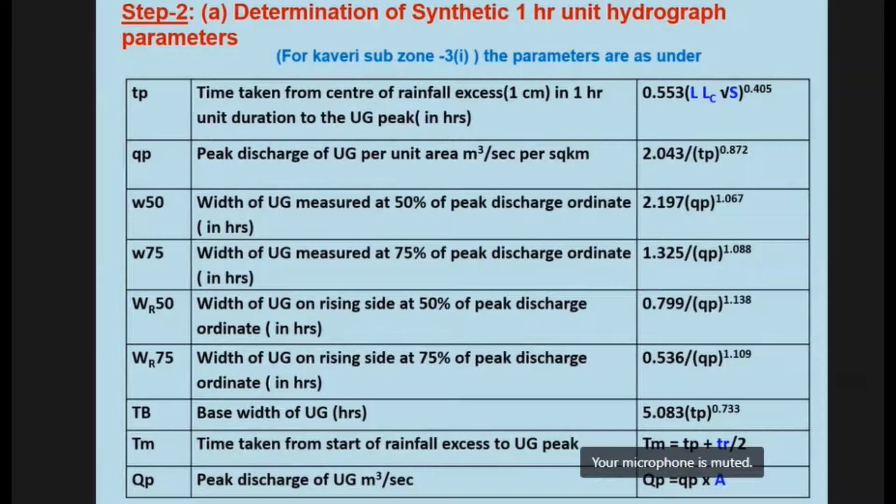सिंथेटिक यूनिट हाइड्रोग्राफ सही बना या नहीं, यह चेक करने के लिए एक फॉर्म मेथड है, एक एम्पिरिकल मेथड है, जिसमें ए एरिया पे चूंकि 1 सेंटीमीटर रेनफॉल हुआ तो टोटल जो डिस्चार्ज आएगा वो इस वैल्यू पे आ जाएगा। सिमिलरली डायरेक्ट रन ऑफ सिंथेटिक यूनिट हाइड्रोग्राफ से निकलेगा, उसके ऑर्डिनेट्स को बेस से मल्टीप्लाई करने के बाद, जो बेस 1 आवर है उसको 60 into 60 सेकेंड्स में कर दिया गया। सारे ऑर्डिनेट्स क्यूबिक मीटर पर सेकेंड में हैं, तो टाइम से मल्टीप्लाई करने के बाद वो टोटल डिस्चार्ज दे देगा, और दोनों फिगर्स को मैच कर लेना होगा। अगर दोनों बराबर आ रहे हैं, तो यह दिखाएगा कि सिंथेटिक यूनिट हाइड्रोग्राफ का शेप करेक्ट है।

अगर वो शेप सही नहीं आता है या दोनों वैल्यू सही नहीं आती हैं, तो फॉलिंग लिम्ब की तरफ जो WR75 के बाद लोकेशन पड़ता है, उस अंत वाले लोकेशन को आगे पीछे करके आपको सिंथेटिक यूनिट हाइड्रोग्राफ के एरिया को A divided by 0.36, यानी 2.78 A, के बराबर लाना है। दोनों बराबर होने के बाद आपका सिंथेटिक यूनिट हाइड्रोग्राफ करेक्ट माना जाएगा।

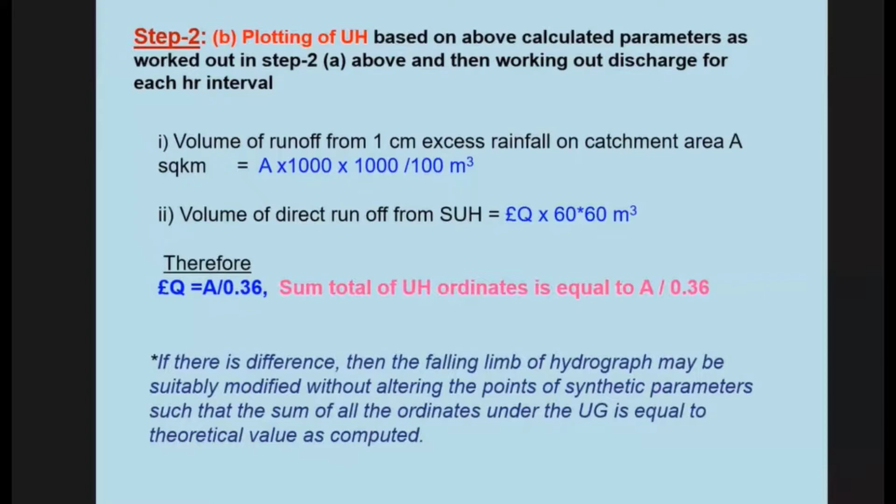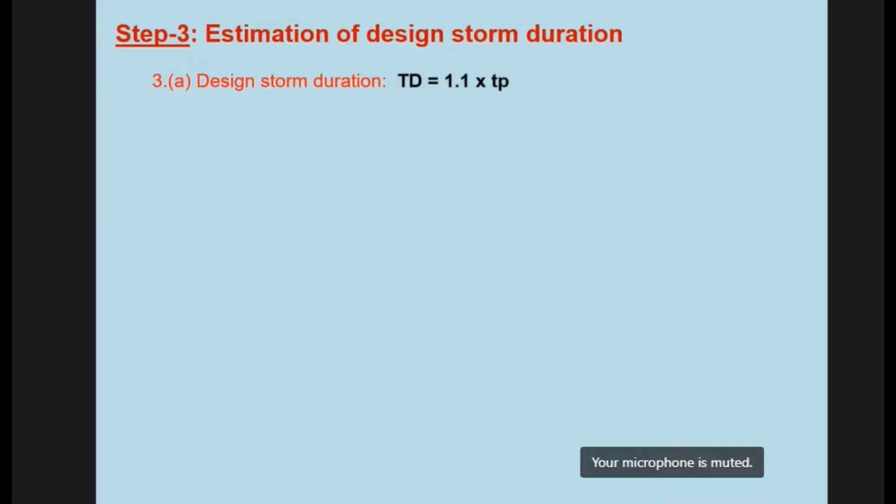अब हम लोग आगे चलते हैं, जैसे हमको डिजाइन स्टॉर्म निकालना होगा, डिजाइन स्टॉर्म के लिए हमको Q50 निकालना है। डिजाइन स्टॉर्म के लिए TP हम लोग पहले निकाल चुके हैं, एज पर आवर, जो हमारा एम्पिरिकल फॉर्मूला है उससे TP निकल जाता है, जिसको 1.1 से मल्टीप्लाई करने के बाद डिजाइन स्टॉर्म आता है। 1.1 से क्यों मल्टीप्लाई करते हैं, तो यह हर एक CWC रिपोर्ट में यह फैक्टर दिया हुआ है। जिस सब जोन में जाएंगे, उस सब जोन के रिपोर्ट में TP को किस फैक्टर से मल्टीप्लाई करना होगा वो देखना होगा, और मोस्टली यह वैल्यू 1.1 रहती है।

अब जब हमको डिजाइन स्टॉर्म मिल गया तो जैसे पिछली बार हम लोगों ने किया था, इस डिजाइन स्टॉर्म पीरियड के लिए हमको R50 देखना है, मतलब 50 ईयर रेनफॉल फॉर दिस डिजाइन स्टॉर्म पीरियड। वो कैसे निकालेंगे? उसके लिए सबसे पहले 50 ईयर 24 आवर्स रेनफॉल, जो डिफरेंट मैप्स हमारे पास हैं, उससे हम 50 ईयर 24 आवर्स रेनफॉल डेटा निकाल लेंगे।

कोई पार्टिसिपेंट बताइए, कैसे मिलेगा हमको 50 ईयर 24 आवर रेनफॉल डेटा? From where we will get? ग्राफ रेशियो से निकालेंगे? नहीं, ग्राफ से नहीं निकालेंगे हम लोग, उसको निकालेंगे। अच्छा, यह आपको छोटा वाला दिख रहा है, चलिए।

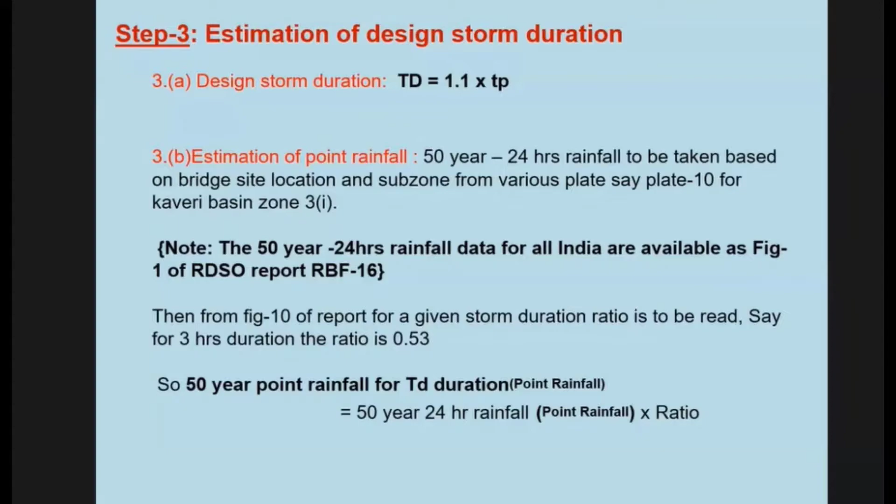50 ईयर रेनफॉल डेटा निकालने के लिए आपको CWC रिपोर्ट्स में जो मैप्स निकले थे वो देखना होगा। जैसे मैंने आपको ऑल इंडिया मैप दिखाया था, उसी तरह हर एक रिपोर्ट के लिए अलग अलग मैप दिया हुआ होगा, जिसमें 24 आवर्स रेनफॉल भी होगा, किसी में 1 आवर रेनफॉल होगा, और 1 आवर से 24 आवर्स में कैसे चेंज करेंगे यह डेटा दिया हुआ होगा, एक रेशियो दिया होगा।

जब वो 50 ईयर रेनफॉल डेटा आप निकाल लेंगे, तो फिर एक रेशियो, एक ग्राफ मिलेगा। जो ग्राफ मैंने दिखाया था, उसमें एक्स ऑर्डिनेट पे आपका जो स्टॉर्म ड्यूरेशन लिखा हुआ है, जो आपका डिजाइन स्टॉर्म ड्यूरेशन है, वो एक्स एक्सिस पे है। और वाई एक्सिस पे क्या है?

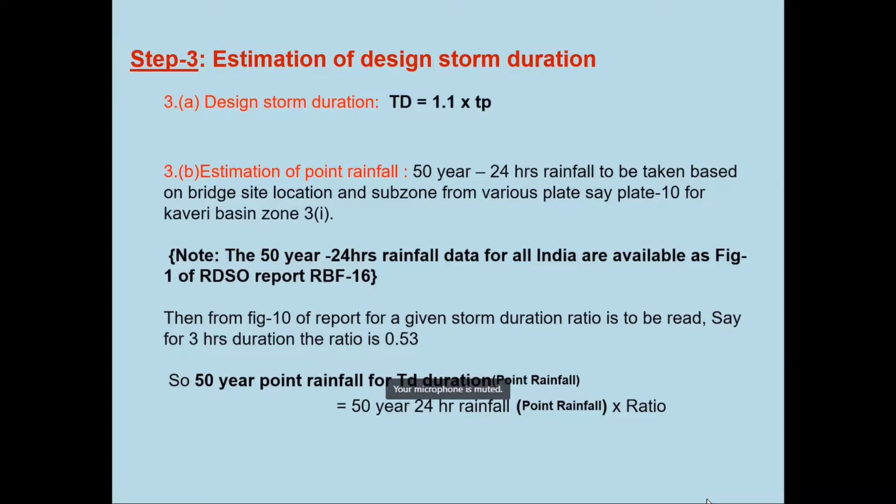इस चार्ट का नाम हुआ, उसमें देखिए ऊपर में लिखा है एरियल रिडक्शन फैक्टर फॉर कन्वर्टिंग पॉइंट रेनफॉल टू एरियल रेनफॉल। जो हमारा RBF 16 रिपोर्ट था, उसमें एक सिंपल सा टेबल दिया हुआ था।

उस टेबल में भी स्टॉर्म ड्यूरेशन था और एरिया था, बट दैट टेबल वाज शॉर्ट, क्योंकि वहां पे एरिया हमें सिर्फ 25 स्क्वायर किलोमीटर तक था। और हम लोगों ने ये भी माना था कि स्टॉर्म ड्यूरेशन भी 3 घंटे से ज्यादा नहीं होगा। दैट इज व्हाई दैट टेबल वाज शॉर्ट।

लेकिन जब हम बड़े एरिया और बड़े कैचमेंट को करते हैं, तो उसमें स्टॉर्म ड्यूरेशन 24 आवर्स तक का रखा गया है। अगर 24 आवर्स से ज्यादा का भी स्टॉर्म ड्यूरेशन हमको डिजाइन स्टॉर्म मिलता है तो हम उसको 24 आवर्स के लगभग ही मानेंगे।

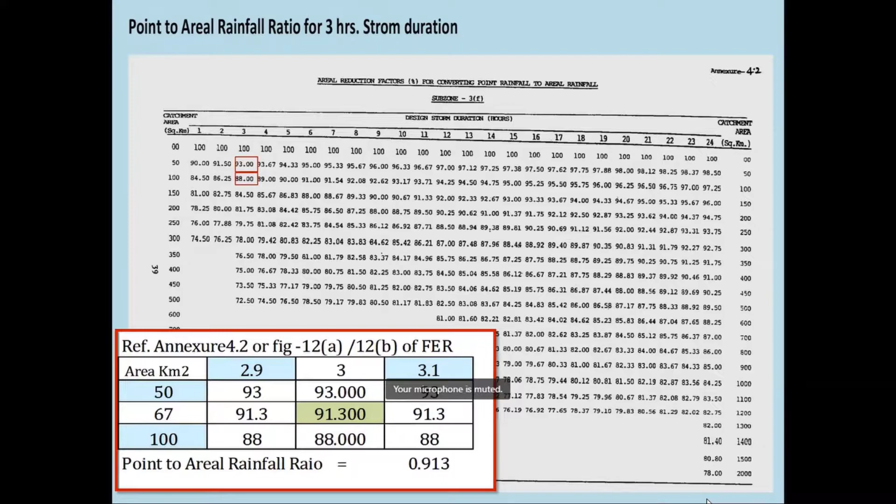एक अमरावती नरखेड लाइन का था, ये नागपुर डिवीजन में न्यू लाइन कंस्ट्रक्शन के लिए था। ओके,

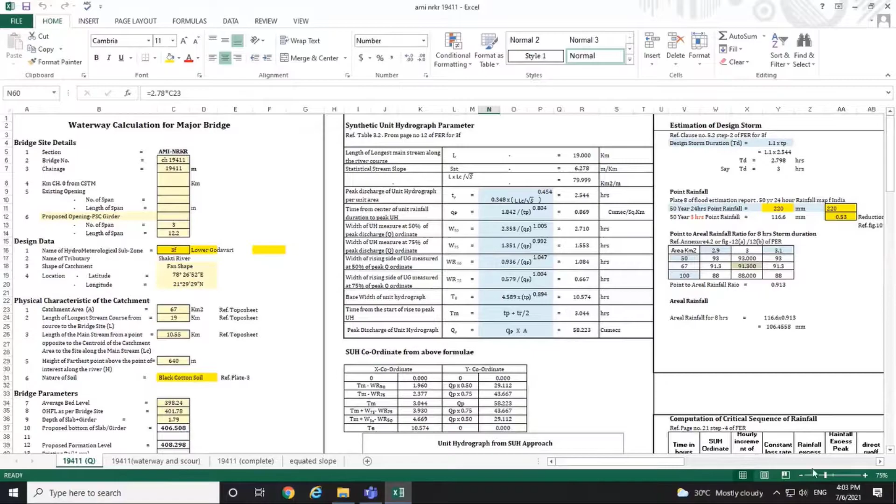So these are the cells where you have to input, you have to fill the input. So this was the latitude and longitude के हिसाब से this is falling in the 3f area. तो आपको जहाँ ब्रिज बनाना है that location you have to collect the latitude longitude उस location का क्या है।

जैसे in this example the latitude was 78 degree 26 minute 52 second and then longitude was 21 degree. So that was falling in the 3f area. Okay, so then you have to refer the report of the लोअर गोदावरी 3f जोन के लिए आपको रिपोर्ट को रेफर करना है।

और उस रिपोर्ट के हिसाब से then these are the constant and these are the formula for working out the coordinate for the unit hydrograph। जो बताया था empirical formula जो unit hydrograph के जो है that depend on the what report you are referring, किस पर्टिकुलर जोन की हाइड्रोमेटीरियोलॉजिकल जोन की आप रेफर कर रहे हो उस पर डिपेंड करेगा। सो फॉर द 3f जोन these are the constant।

कावेरी में आपने देखा था some constant are different but it will depend on the L, LC and square root S only। but इसके जो prefix हैं और जो power है that is the different is for the different all.

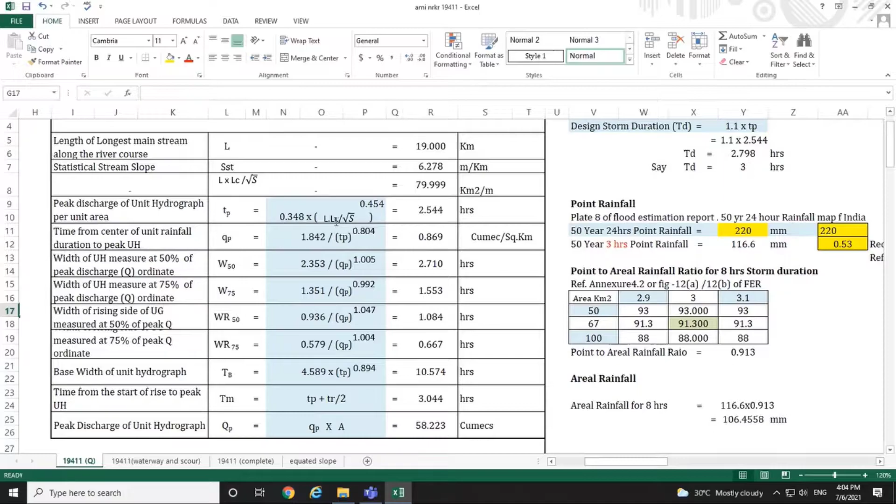The different zones have different values, so depending on your hydrometeorological zone, you can modify this formula for the first instance, then you can use that Excel sheet.

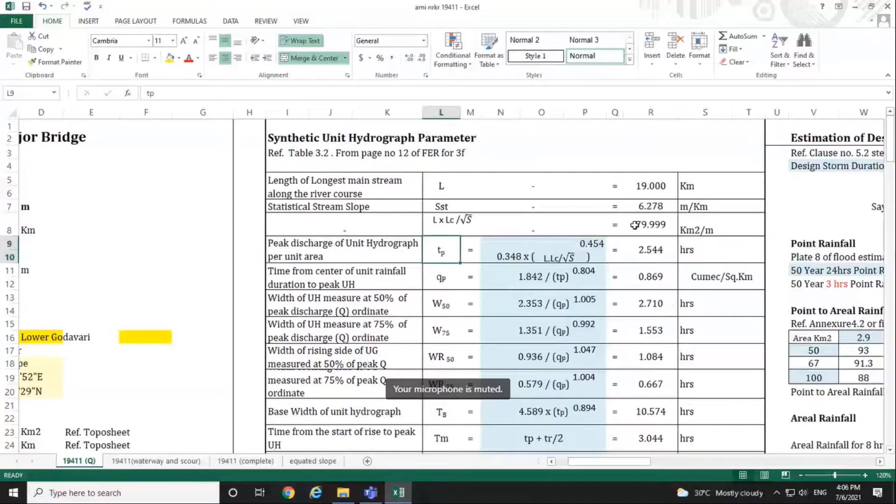This has been calculated, then automatically your value comes here. So these are the values for fixing the 7 coordinates - 1,2,3,4,5,6 - for the coordinates to be made, these are the values of W50, W75.

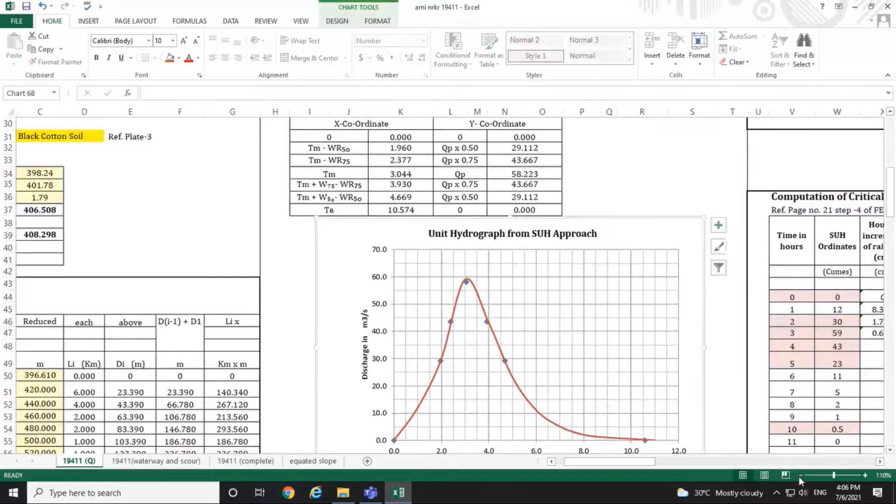Then you can work out how the coordinate starts at 0,0. It will start from 0,0. So the first coordinate is 0,0.

The second coordinate is W50. This is at the highest peak that is coming, in terms of time. This is TM minus what? TM is the time from the start to the peak, this is the time of the highest peak.

TM is the time from the start of the rise to the peak. So this coordinate will be TM minus WR50, you need to calculate. So you will get the x coordinate for this point, and what is the y coordinate?

Peak's 50% discharge - so what was your peak discharge? 58.223. So automatically it will take 50% for you. It will pick up the values from these tables, whatever you've calculated, using the inbuilt formula, and this will give the x coordinate and y coordinate for this point.

Again this is the 75% - this y coordinate is the 75% of the peak, and this is TM minus WR75. So this formula is TM minus WR75, and what value is it taking?

This is the cell R23, this is the value of R23. If you look at this, the formula is R23 minus WR75. So this is giving the value of this cell.

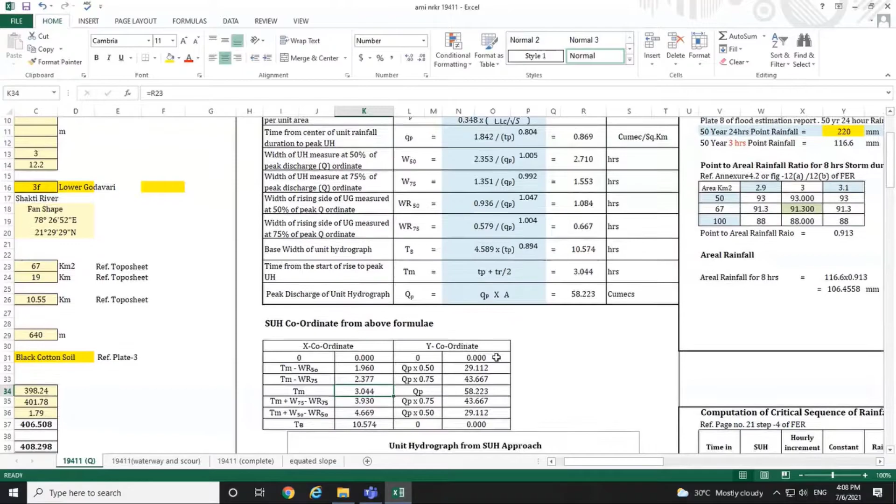Once this is fixed, it will automatically draw the graph - it will mark these 7 points on it. It will not draw the graph directly, it will mark all these 7 points automatically. Then you have to draw the hydrograph.

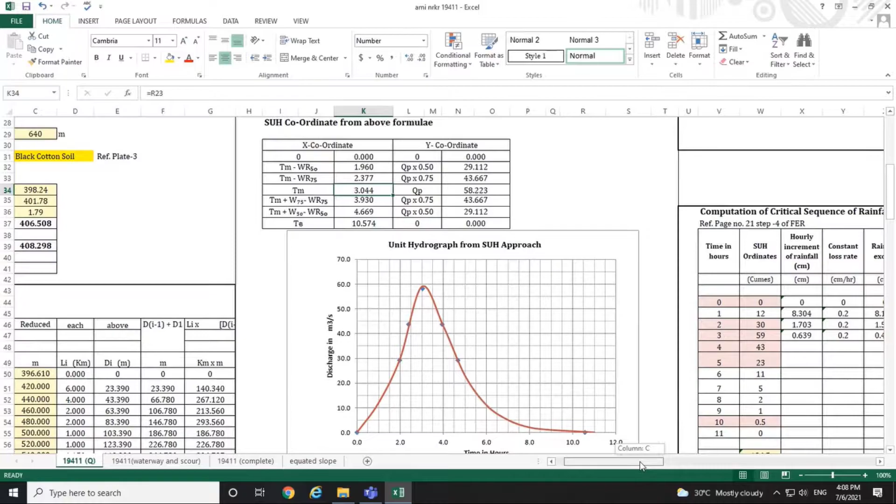Now you need to draw the hydrograph once you have the 7 ordinates. The starting point is 0, and what was the last point in this? The last point is coming to TB is 10.5. So this is the last point.

Okay, so according to that you distributed this hourly, from 0 to 10 and roughly 11. 10.5 we won't take, so we distributed it into 11. Then these are the ordinates.

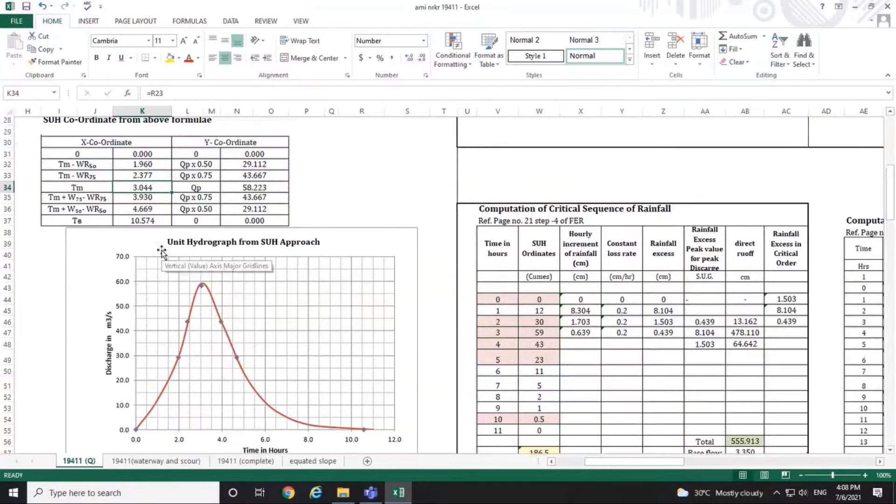At 0, you know the ordinate will be 0. Then this is the ordinate at 1.96 - the x coordinate is 1.96, so generally it is near 2. And at 1.96, the value is coming as 29, so roughly we have taken 30. So these two are your fixed coordinates.

Here we can't play with the ordinates. Then again at 3.044, this is the ordinate - at 3 point your value is coming as 58, so we have taken 59. Then next is 3.9.

All these blue ones that you marked, these are the fixed ordinates. These are the fixed points based on the CWC report. The 7 ordinates we derive for the hydrograph will be fixed ordinates, from which you have to draw a best fit curve.

Okay, so the next is 3.930, so we have taken 4. And after 4, here the value is 43.66, so roughly we have taken it from 43.66 to 43.

Because this is slightly higher than 4 and it's decreasing, so we can take lower values. Then 4.669, so roughly it comes at 5, between 4 and 5. And the value here is 29, so we can take it lower than that - you can roughly derive it or adjust it depending on the curve.

Then the last value is from 10 to 0.5. So these highlighted ones are the fixed coordinates, and you can play with the white cells.

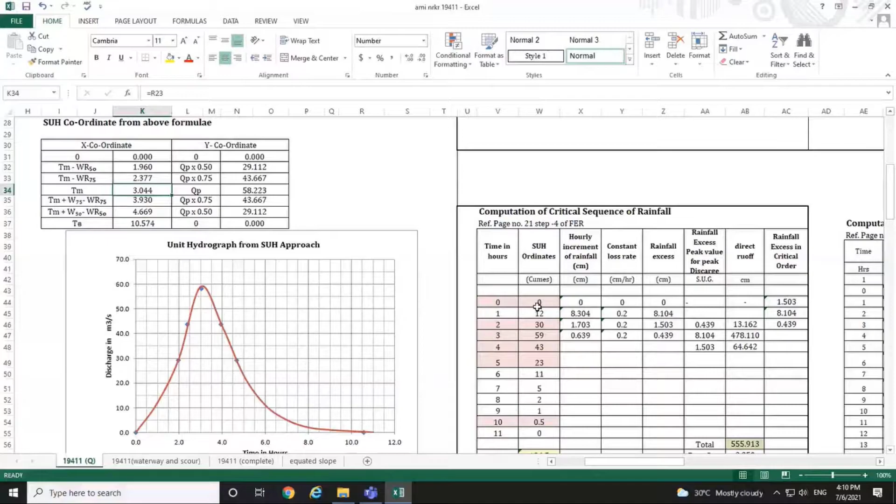So if we change the value, you know that the sum of the ordinates should be equal to the theoretical value. You calculated the theoretical value - how does that come? Theoretical value will be 1 centimeter rainfall over the complete area, and that estimated value is coming as 186 point something.

This is 1 centimeter rainfall over the complete area, reflecting as 186.26, and the summation of your ordinates should be equal to 186.5. Suppose I haven't fixed the ordinate here yet.

I am just deleting every ordinate where I can adjust it. Okay, so this is 150. Now we have to fix the ordinate, and it should form a smooth curve.

Suppose I have taken 9 here, then after 23 you feel that it's declining, so I took 21, then after this 21 it's quite steep, so maybe you can say I took 15.

Then you can take it - then 6 I took, then you took 3, 2, or took it as 1, and then at 11 it is 0.

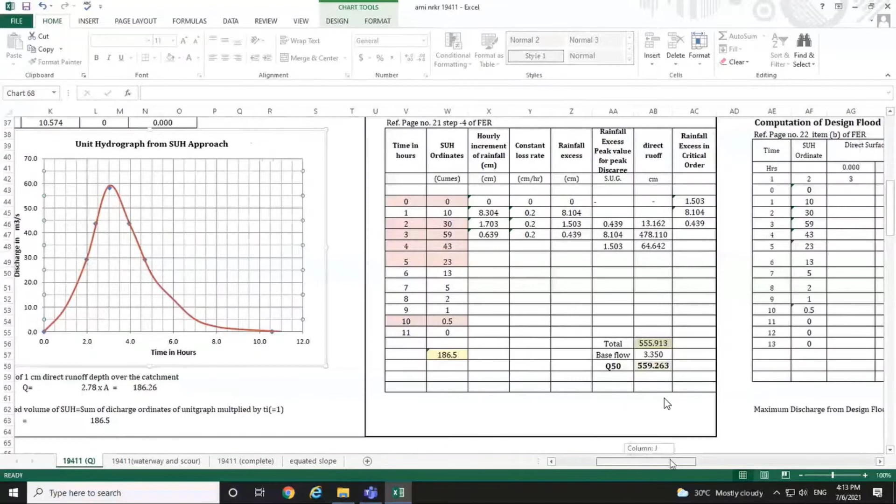Okay, so you have to do permutation combination to draw the best fit unit hydrograph curve. Once it has been plotted, the next target is to calculate the rainfall. TD, as sir explained, is 1.1 times of TP. So TP you have calculated here.

R9 was where? This is R9, 2.544. So it is coming roughly 3 hours. It is coming to 2.798, so you can take it as 3 hours.

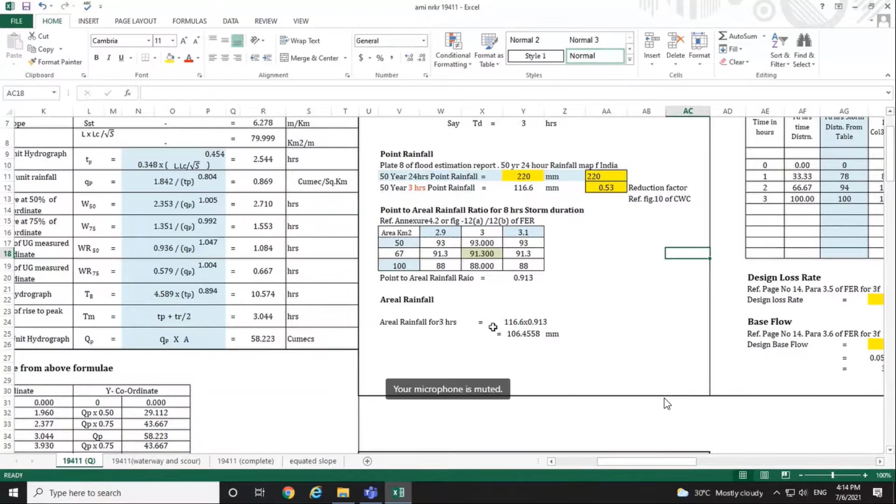And then it is to be distributed into the duration. You have to distribute it into 3 hours. So sir told you how to do the distribution.

So these values to be taken, whatever is in this light sky blue color, are the appropriate values to be taken by referring to the CWC report. For the 3 hours distribution, you have to take this cumulative percentage table that shows how much will be in the first hour, second hour, third hour. That is giving the cumulative rainfall in the first hour, first 2 hours, first 3 hours.

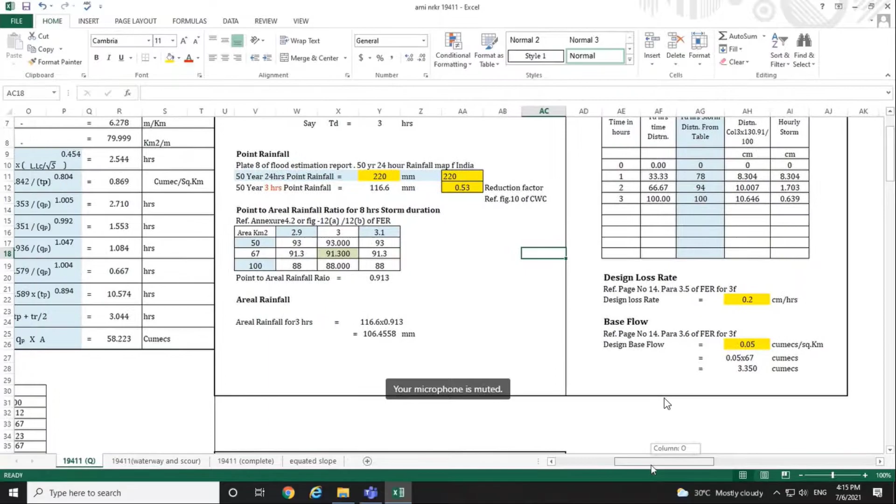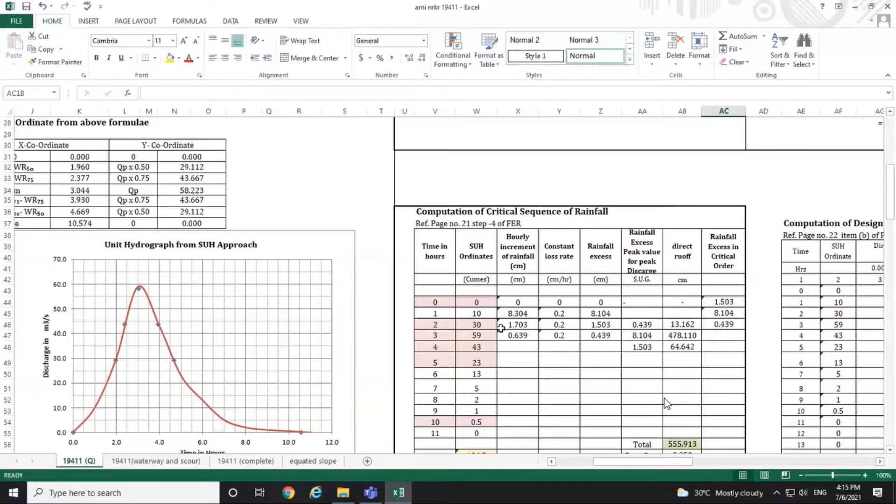Now because of this storm, what will be the hydrograph? You have to take the help of the unit hydrograph. We will superimpose the intensity of the rainfall on the unit hydrograph. This is the intensity of rainfall distributed over 3 hours, from which we subtracted the constant losses.

So this is the effective rainfall. If effective rainfall is less than 0, if it is coming negative, then that is to be neglected since it is surplus to the base loss. So this is 0.439, 1.503, 8.104.

Now we are interested in the maximum value. When will the maximum value come? The maximum intensity will correspond to the peak of the hydrograph. What is the peak of my hydrograph? It is 59, so we have to place this 8.104. It is the summation of the three ordinates.

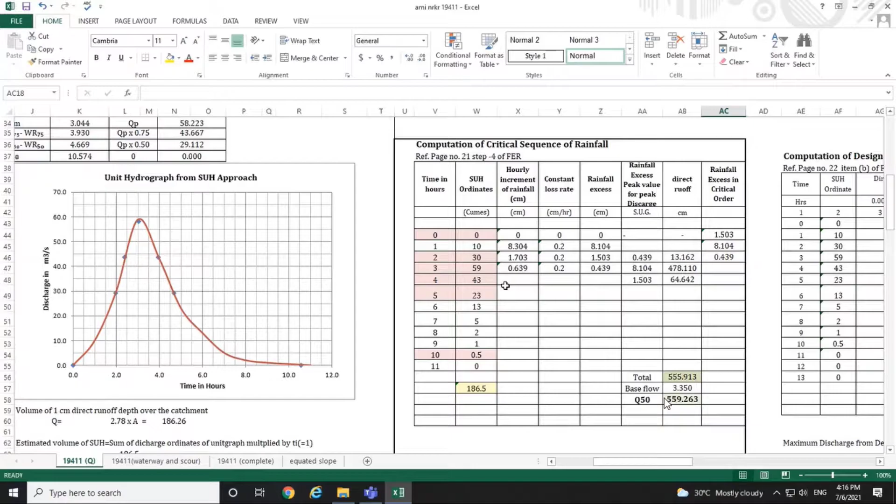If you look at this, this is the final hydrograph. It is the summation of the three ordinates.

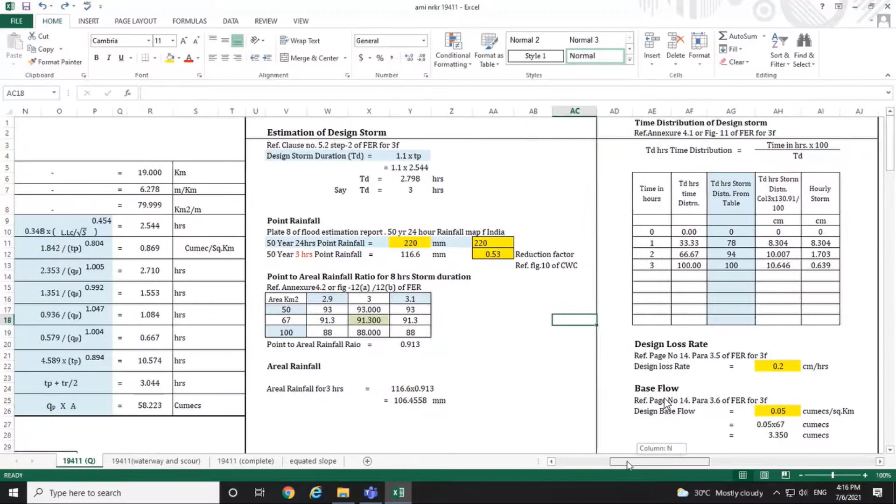This is the unit hydrograph, and we are superimposing on the unit hydrograph. This unit hydrograph has been converted into the flood hydrograph. In the flood hydrograph, this is for the first hour, this is for the second hour, this is for the third hour, and we are looking for the maximum value.

For the maximum value, this is the maximum ordinate of the unit hydrograph.

Okay, so our intensity, what was the maximum intensity? 8.104. So if we multiply this ordinate by 1.503, the value 88 is coming. Multiplied by 8 point, it comes to 243, and multiplied by 0.439, it comes to 4.38.

This means that if we place the intensity of 8.104 in such a way that it contributes to the maximum, it will come again in the middle. That's why we put it against this one.

Then the next higher intensity was 1.503, so that should come against the next higher ordinate of the unit hydrograph. So that will be placed against the 43, which will give the order.

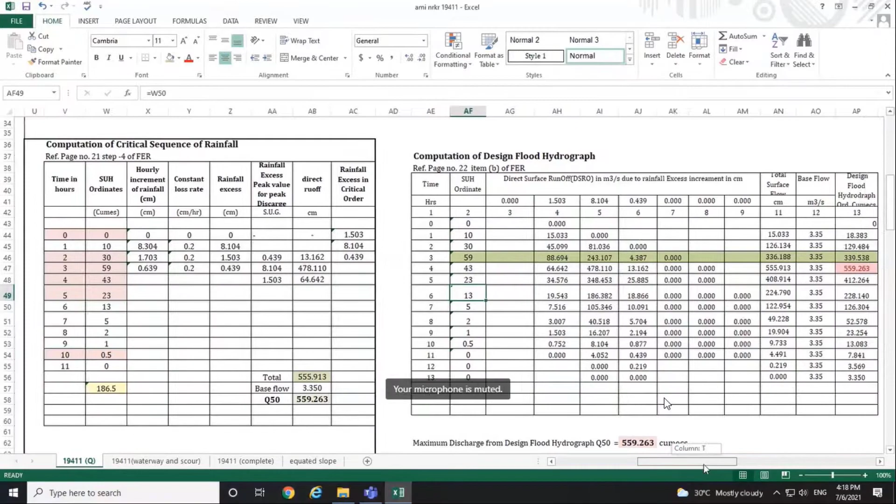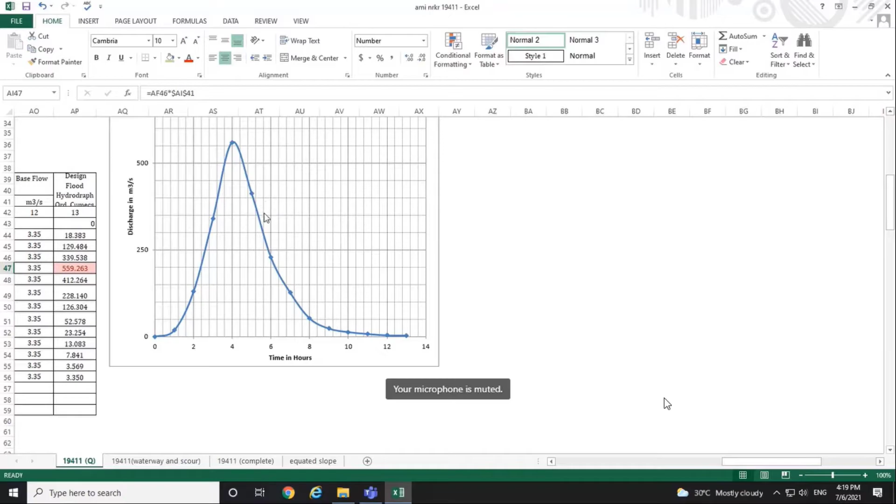Otherwise, if you are deciding the opening and other things only, then only we are interested in the Q50. Then if you have worked out the flood discharge by superimposing, no need to draw this flood hydrograph. Okay?

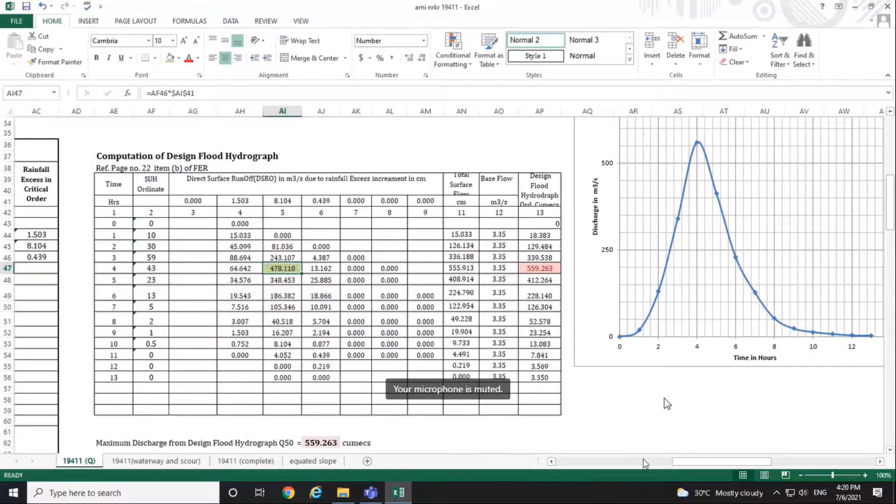Yes sir, और दूसरा एक क्वेश्चन था सर। तो जो यूनिट हाइड्रोग्राफ हम ड्रा करते हैं, उसमें करेक्शन सिर्फ फॉलिंग लिंब में ही करेंगे, राइजिंग लिंब में नहीं कर सकते? जैसा आपने वीडियो में भी देखा होगा, दिस फॉलिंग लिंब इज क्वाइट फ्लैट टाइप का है।

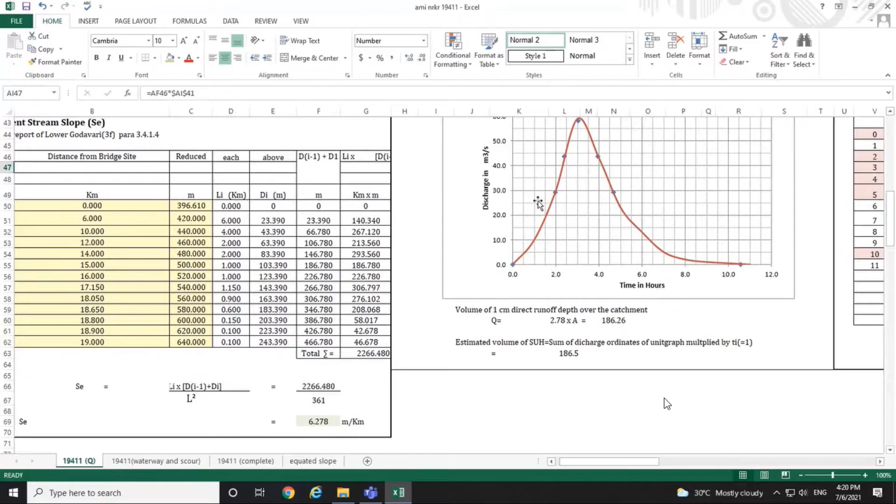एंड राइजिंग इज क्वाइट फास्ट। सो इन द CWC रिपोर्ट, इट इज बीन गिवन द समेशन ऑफ योर ऑर्डिनेट, इसके अंदर जो वॉल्यूम है, दिस इज व्हाट इज दिस बाय ऑर्डिनेट, आपका क्या है मीटर क्यूब पर सेकंड, और नीचे सेकंड है। तो जब आप इसके अंदर का डिस्चार्ज निकालोगे, एरिया ऑफ दिस यूनिट हाइड्रोग्राफ, व्हाट विल गिव द मीटर क्यूब पर सेकंड मल्टीप्लाई बाय द सेकंड, इट विल गिव द वॉल्यूम। व्हाट इज गिविंग? दिस इज द वॉल्यूम ओनली।

Okay. So यहाँ पे क्या है? This volume should be equal to the theoretical volume. Theoretical volume आपने निकाला है। So you can make the corrections in the falling limb after this. These are the fixed ordinate। जो आपके blue वाले हैं, these are the fixed ordinate। We can't change it। This has been worked out based on the CWC report।

So margin is available only beyond this W50 का जो falling limb है, वहां से लेके 0 तक में ही margin आपके पास में है। This has been given in the CWC report। Corrections can be done only beyond this W50 falling limb to the TB only। Any other question?

So summation of the ordinate जो आप निकाल रहे हो, basically क्या है? This is the summation of these two ordinate multiply by the 1 hour। So it will ultimately give the total volume। So we are equating the volume here only।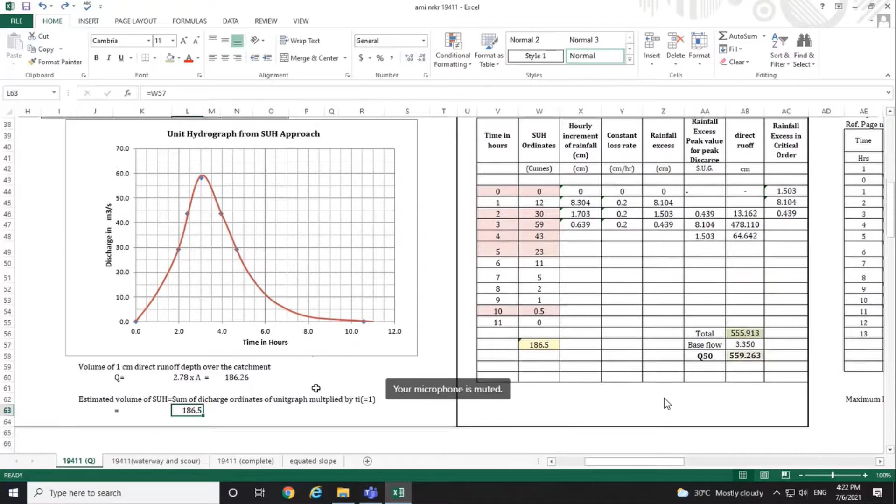So I will upload this Excel sheet in your course program। तो आप उस मटेरियल से इसको यूज कर सकते हो। Only have to modify this। Initially आपको एक बार इन formulas को modify करना है।

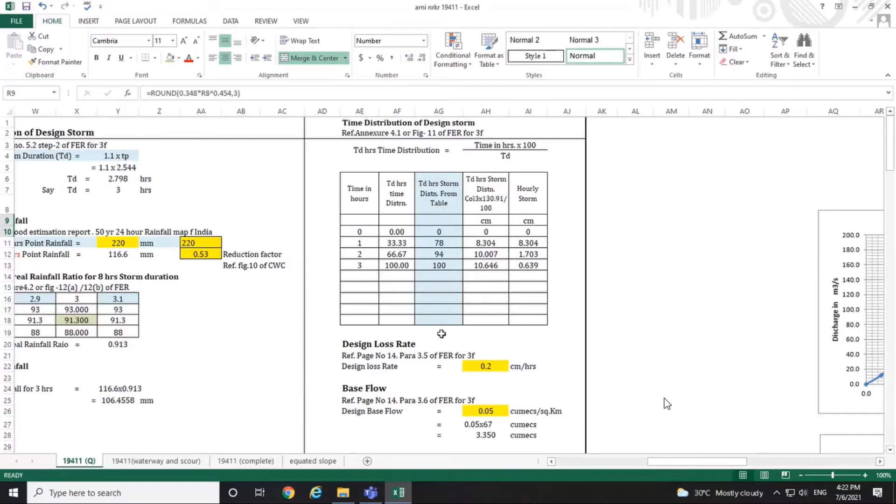बाकी depending on आपका unit hydrograph का base क्या है, उसके हिसाब से you have to make the corrections। क्योंकि distribution वगैरह आपको निकालना पड़ेगा, उसके हिसाब से these values is to pick up from the CWC report। और duration आपका अलग आ सकता है, तो you have to make the appropriate corrections in your Excel sheet। ठीक है? इसको फिर आप readymade यूज कर सकते हो।

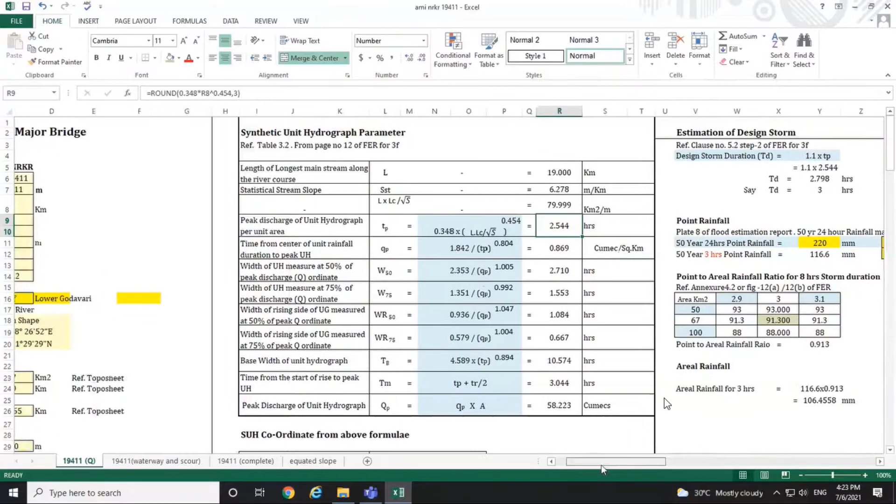Once आपने अपने प्रोजेक्ट के लिए एक बार Excel sheet बना ली, generally the one project is falling in one particular hydrological zone, तो आपने एक बार Excel sheet बना ली, that will be applicable to all the bridges। Generally ऐसा कम ही होता है कि एक प्रोजेक्ट 2 या 3 hydrometeorological zones में आता है।

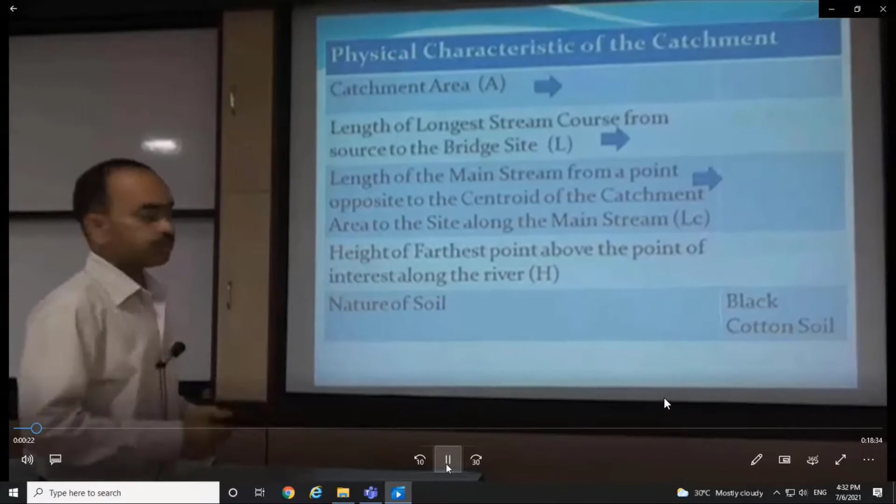These characteristics of the catchment area are required for the calculation of the design discharge. The parameters to be calculated are catchment area in square kilometers, length of the longest stream course from the source to the bridge site denoted by L in kilometers, the length of the main stream from a point opposite to the centroid of the catchment area to the site along the main stream denoted by LC, height of the farthest point above the point of interest along the river denoted by H, and the nature of the soil. All these parameters are required for the purpose of calculation of the design discharge.

For calculation of catchment area, we require the topo sheet. An appropriate topo sheet is to be taken. Topo sheets are made available by the Survey of India, and physical topo sheets are available. This topo sheet has a contour interval of 20 meters, and other features are also available on the topo sheet.

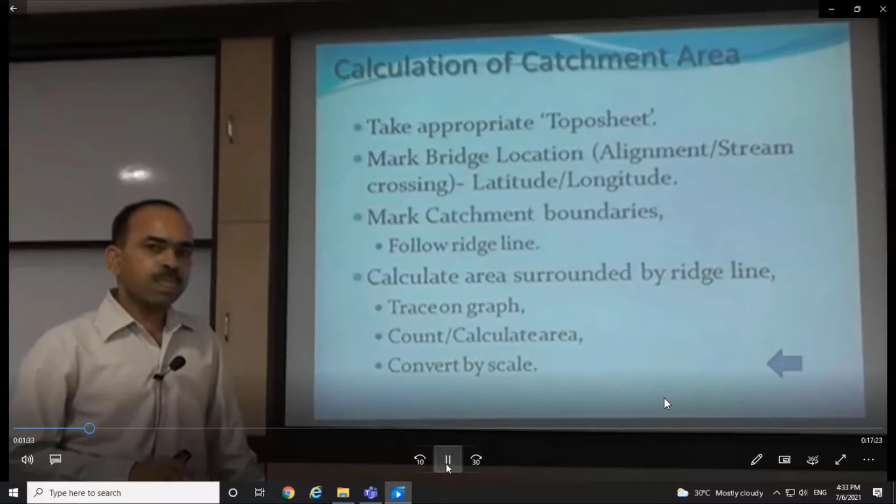First of all, on the topo sheet we have to mark the alignment and the location of the bridge. After marking the location of the bridge on the topo sheet, the next task is to mark the ridge line, that is the watershed area.

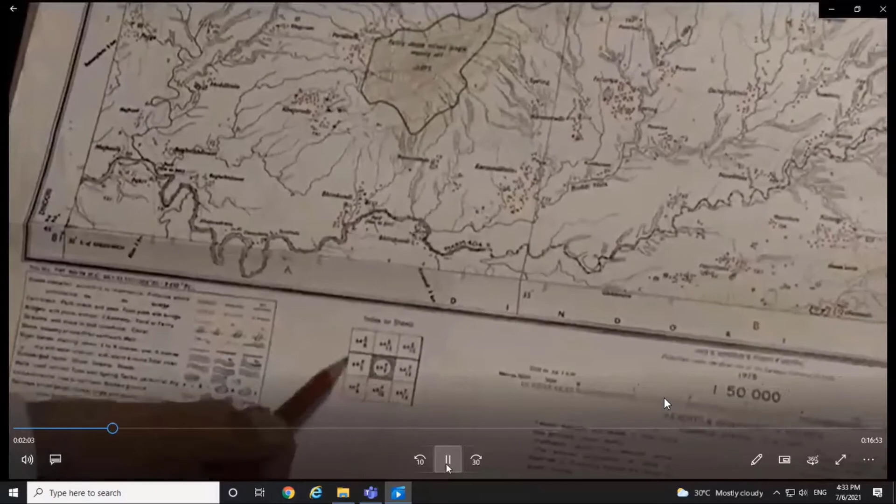Every topo sheet has a district number given on the right hand top corner, and the adjacent topo sheet number can be found at the bottom. There is a grid given for 9 topo sheets. In the center is the number of this topo sheet, and the sheet on the left hand side has its number given here, while on the right hand side the number is given there. Similarly, for this topo sheet number, the sheet on the right side will be this, and on the left side another sheet number will be given. This is how to find out the relevant topo sheet.

The second important thing about the topo sheet is its scale, which is always 1 in 50,000. This means if I measure 1 centimeter on this topo sheet, it is equal to 50,000 centimeters on the ground. It means 1 centimeter is equal to 0.5 kilometer.

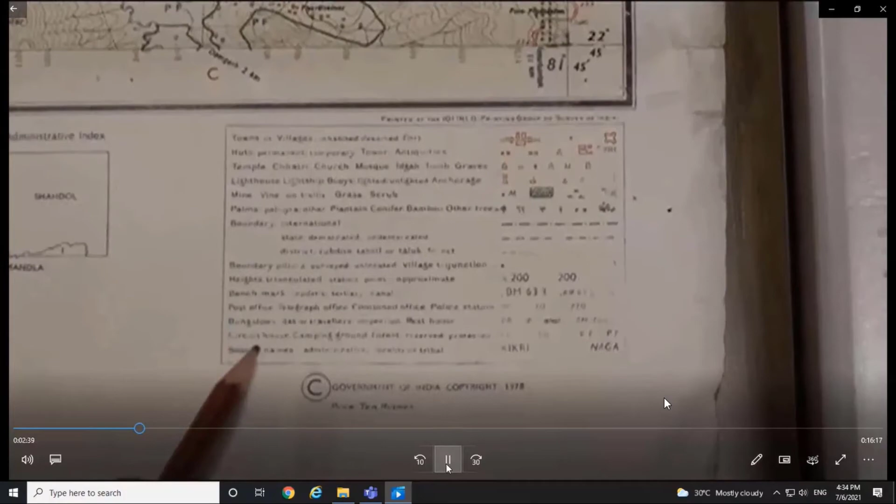Abbreviations used in the topo sheet are also given in tabular form, such as the marking of rivers, roads, and other topographic objects. Another very important information available from the topo sheet is the contour, with a contour interval of 20 meters. Nowadays, digital topo sheets are also available where the contour interval can be made available.

For the purpose of demonstration, I have taken a xerox of the relevant topo sheet. On this topo sheet, first of all, the alignment is to be marked. The railway line alignment has to be marked on the topo sheet like this.

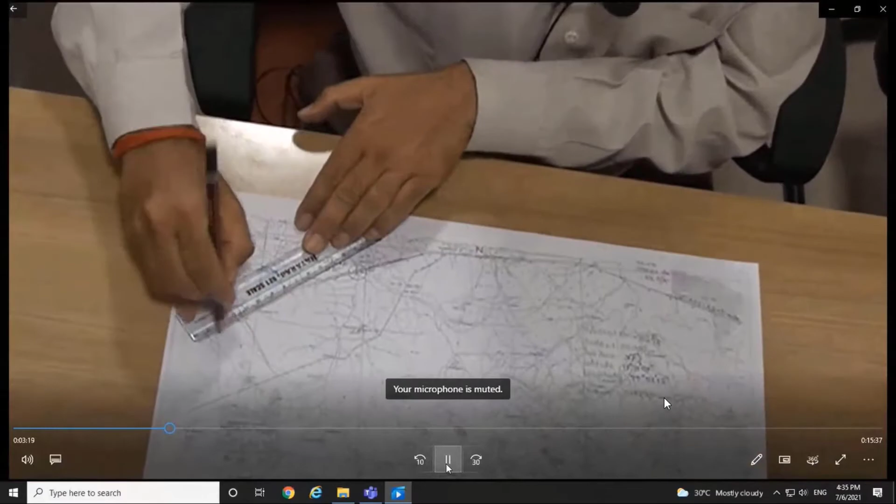The location of the bridge is also to be marked on the topo sheet. The location of the bridge is available in terms of latitude and longitude, so it is to be marked on the sheet.

The next task is to mark the ridge line. Normally, all river patterns are like a root pattern. Small streams come together and fall into a main stream, and then the main stream comes to the bridge site. There may be different networks of streams coming to a single bridge, so the task is to find out the area from which the water is coming to the bridge under consideration.

So how to mark the ridge line? I will search for the intermediate point of two streams flowing in different directions, marking the approximate middle path between them. This way I am able to locate the ridge line within which the water is coming to my bridge.

Now I am following the ridge line. It will go something like this, covering all the rivers, streams and tributaries from where the water is coming to my bridge side. In this way I mark the ridge line, and from the other side also I go similarly, marking the ridge line so that I am able to calculate the area from where the water is coming to my site. This is the area which I have marked as the ridge line.

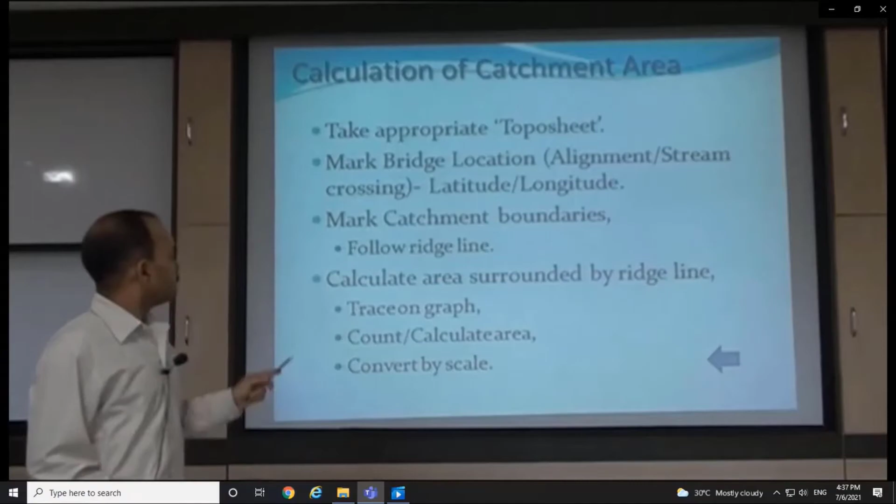For the purpose of calculating the catchment area, we have already taken a copy of the topo sheet. We have marked the bridge location based on latitude and longitude, and marked the catchment boundaries, that is the watershed line, following the ridge line. Now the next task is to calculate the area.

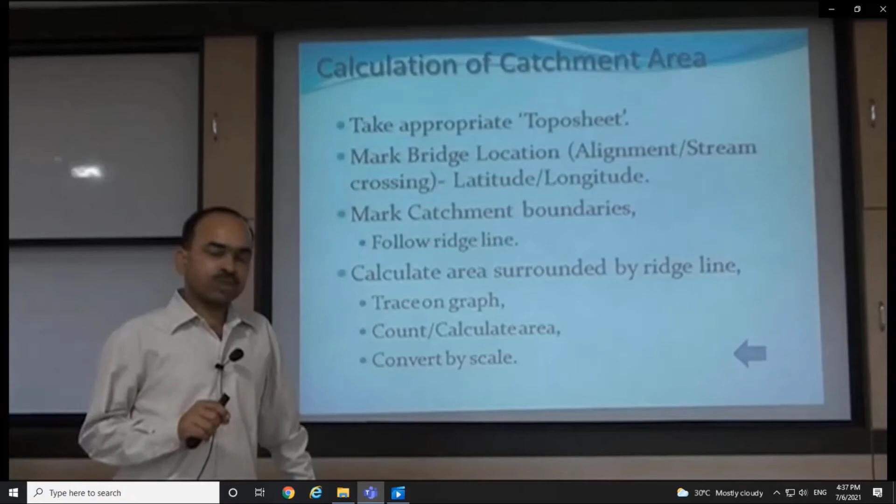For the purpose of calculating the area, this irregular shape is to be transferred onto a centimeter graph sheet, 1 centimeter by 1 centimeter, and then we can calculate the area very accurately. After tracing this irregular area on the graph sheet, either we can count the squares, or by making big rectangles or small rectangles, we can calculate the area.

So now, first I will mark the alignment, the bridge location, and then trace the irregular catchment area.

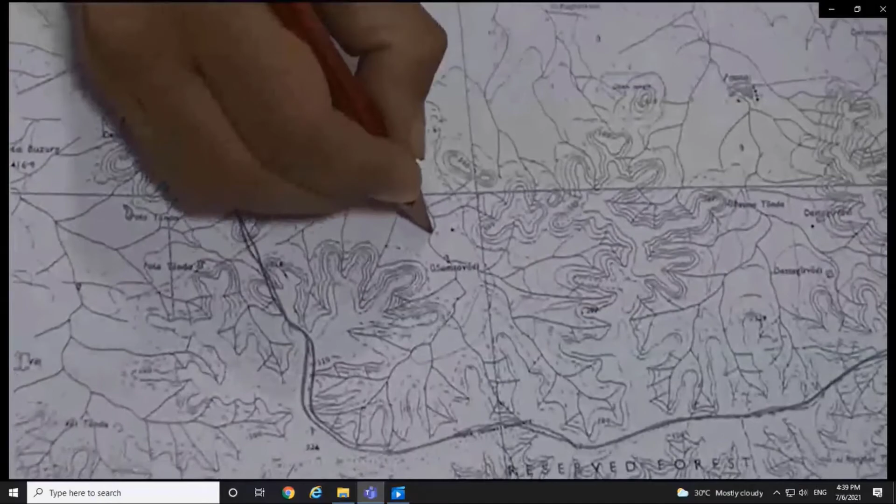Simultaneously, one more thing is required: the length of the longest stream. So on this sheet only, I will mark the different streams flowing to the bridge side, and then measure the length so I can find out which is the longest distance from where the water is coming, making the different streams darker so I can make out which is the farthest point from where the water is coming.

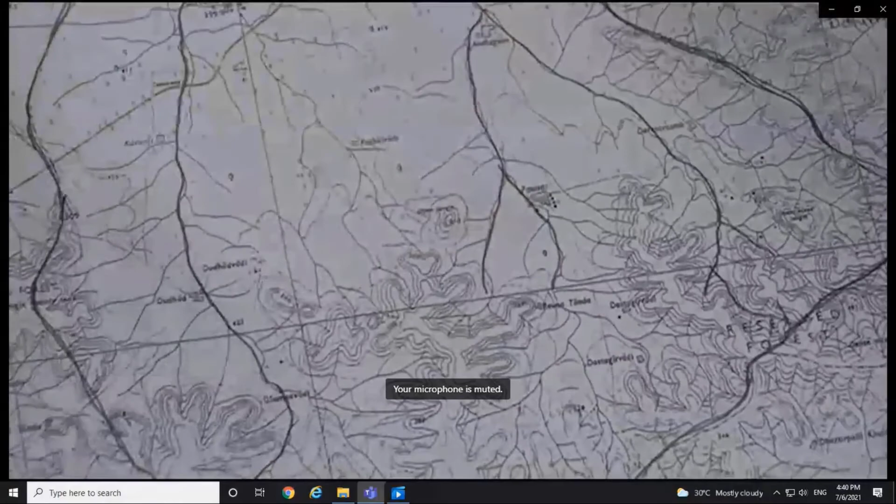These are the main streams which are coming to the bridge side.

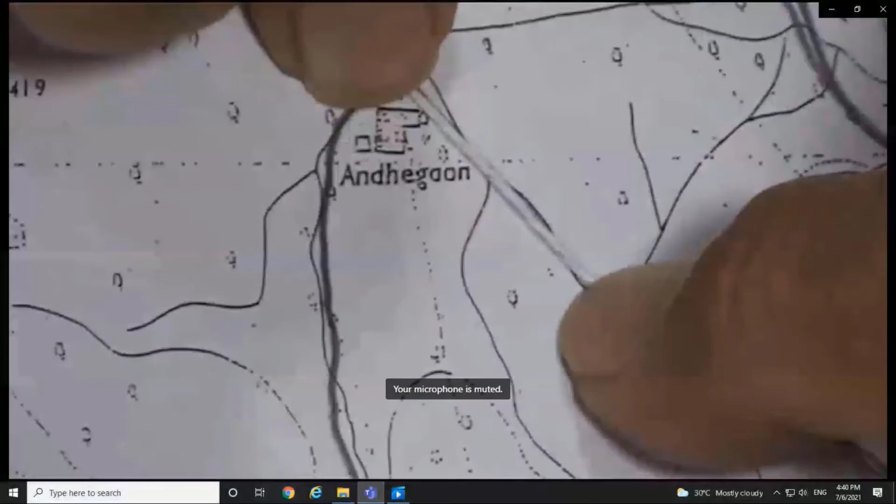Now I will measure with the help of a thick thread what is the length of the longest stream, spreading the thread along the curvilinear path of the stream so I can calculate the length of the different streams coming to the bridge side.

So now this is the length. I will measure the length with a scale, and the length for this stream is 23.5 centimeters. Keeping in view the scale, I will convert this length. Similarly, I will measure the length of the other stream also and find out which one is the longest stream.

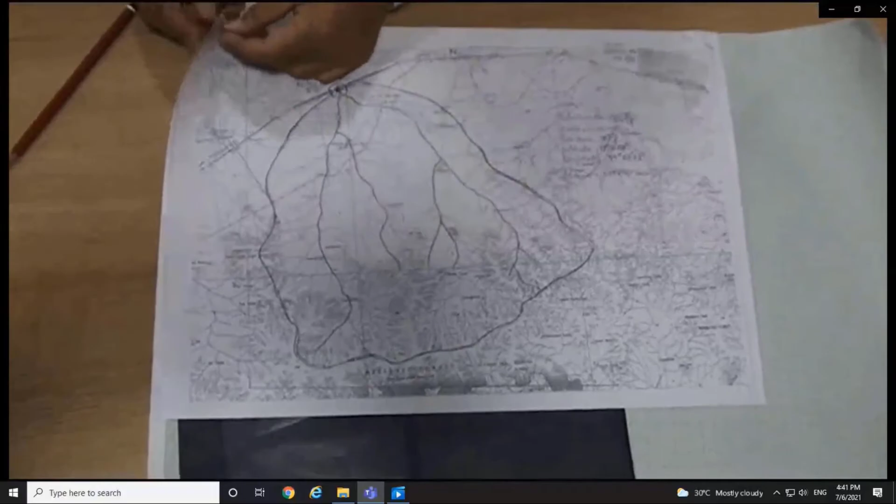Now the next task is to find out the area and the CG of this irregular shape. To find the area, I will take the shape on the graph sheet, and either count the full squares - like this, 1, 2, 3, 4, 5, and a half can be taken as 1 - or the better way, I can mark a big rectangle on the topo sheet available within the area, which is a full rectangle, and the smaller rectangles also.

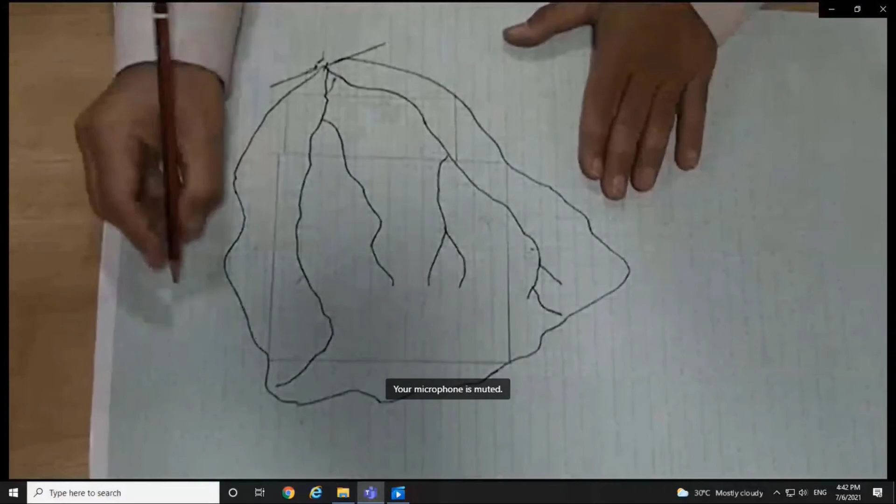Measuring the length of these rectangles, I can calculate the area and sum them all up to get the area of this catchment. Similarly, the length of the stream, which we have already measured, I require the point against the centroid of this area. To calculate the centroid of this area, I will be taking a hard card sheet.

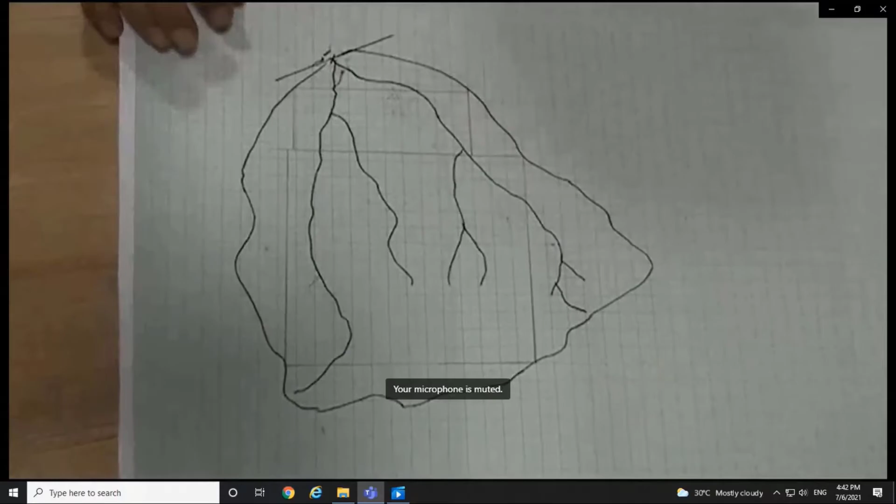Over this hard card sheet I will be transferring this shape. To find out the CG, I will be taking the irregular shape onto the hard card sheet, cutting this shape regularly as per the marking, placing the shape on the sheet.

Now the next task is to find out the CG of this. For finding out the CG, I require a plumb bob and a hanging arrangement. I have made a point from where the irregular area can be hung, and I have already marked the plumb line on the table. So now this is done.

Now I will be hanging this sheet from the same point, find out and connect, and then mark the plumb line over the sheet. Similarly, I will hang the same from another corner, from the same hanging point, and again find out the plumb line on this.

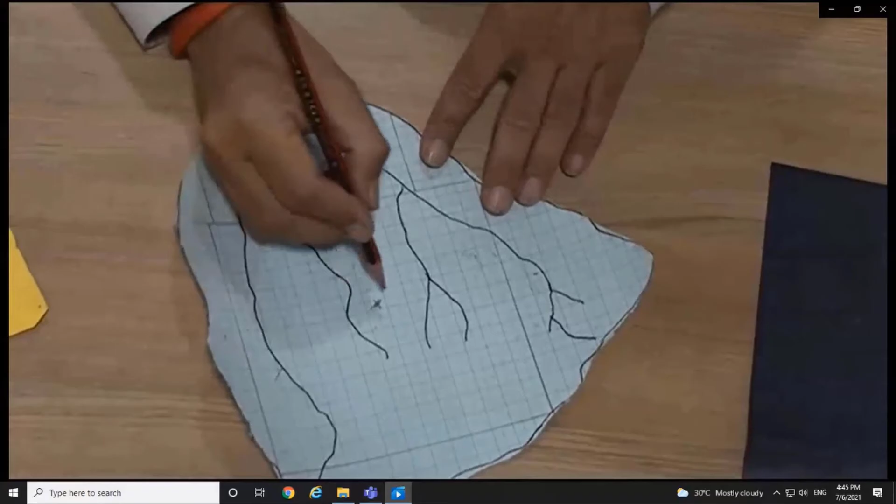So I have marked the CG on the irregular area, and my next task is to find out the length of the stream against the centroid. Using an arc, I will mark this. Say this is my longest stream, so I will mark the point opposite to this centroid. This is the point up to which the LC is to be measured. Again, using a thread in a similar manner, I will be marking.

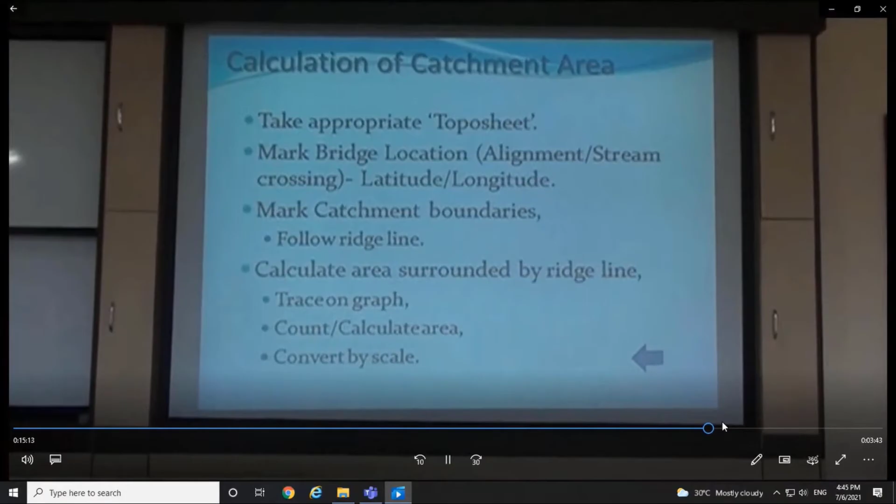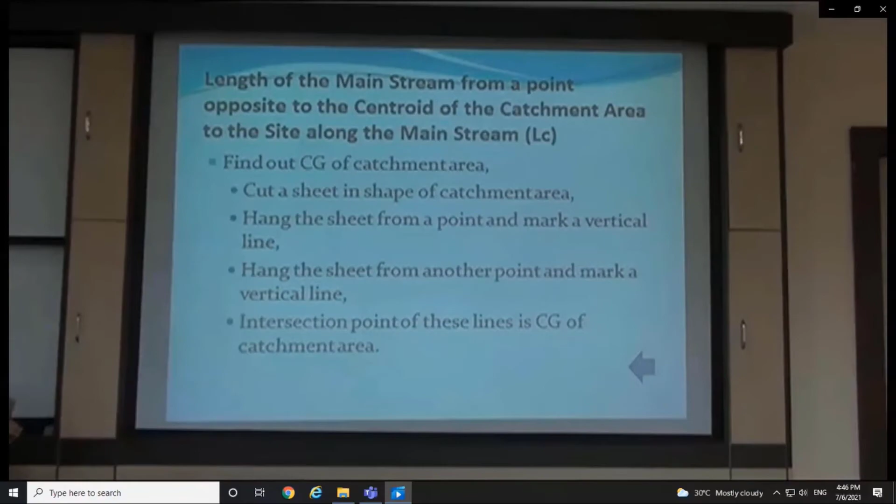We have already calculated the catchment area, and for other calculations such as the length of the longest stream following the main stream, we measure by thread, which we have already done. Then the length of the longest stream opposite the point. Find the CG of the catchment area by the manner described: cut a sheet in the shape of the catchment area, hang it from a point and mark a vertical line, hang it from another point and mark a vertical line. The intersection of these lines is the CG of the catchment area, and this CG is to be transferred onto the topo sheet.

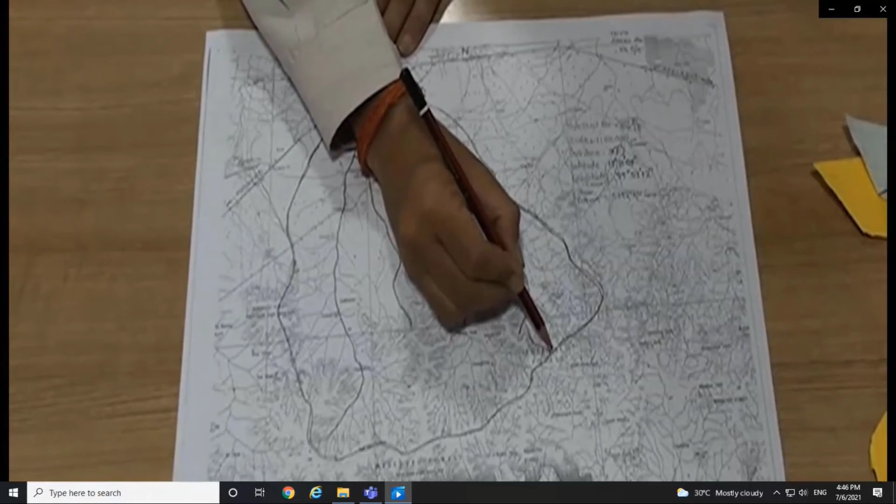Next task is to calculate the statical stream slope also. I already know the bed level of the bridge, and I can find the level at the start of the longest stream, which is available from the contour interval.

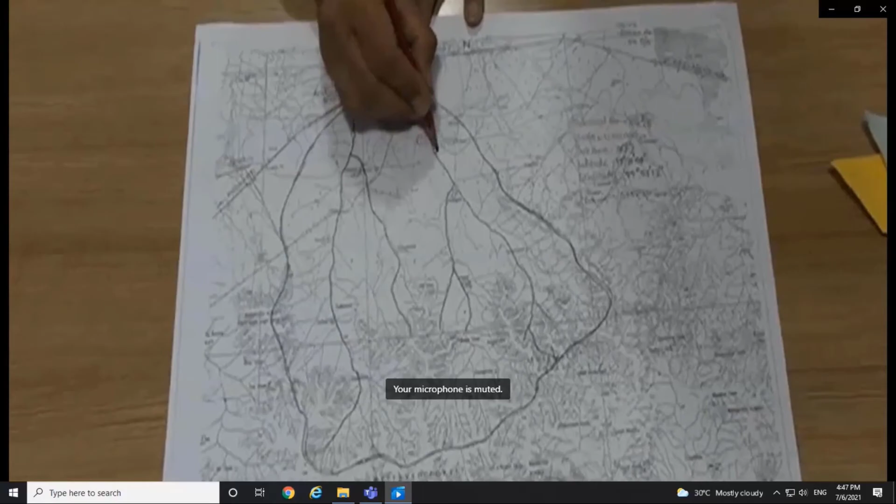Next, I will mark the different contours where they cross my stream. For example, this is the contour of 400 meters, crossing here. The next contour is 420 meters, crossing my stream here. So I will write 400 here, 420 here. Similarly, I will go up marking all the contours whose values I know and which cross my stream.

The next task is to calculate the length from the bridge site to the point where the contour is crossing. I want the length between the two points where the level is 400 on the stream and the bridge site, and another where the level is 420 and the bridge site. I will tabulate all these things for the purpose of calculating the statical slope of the stream.

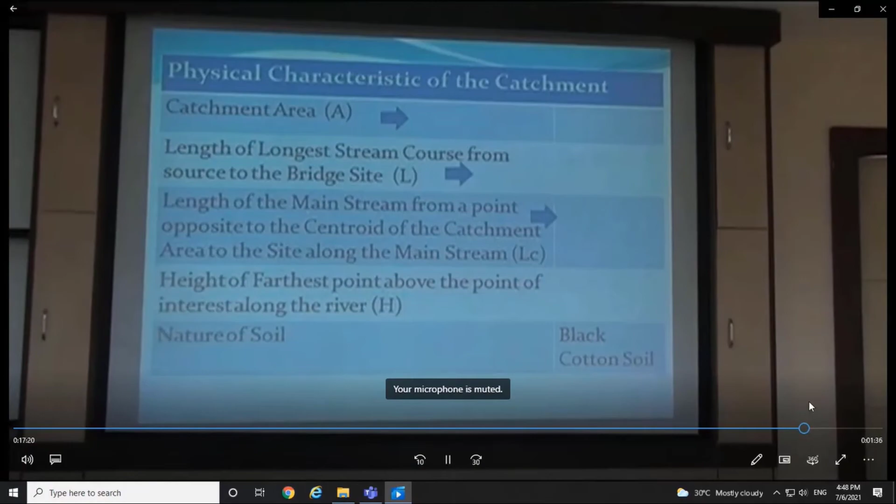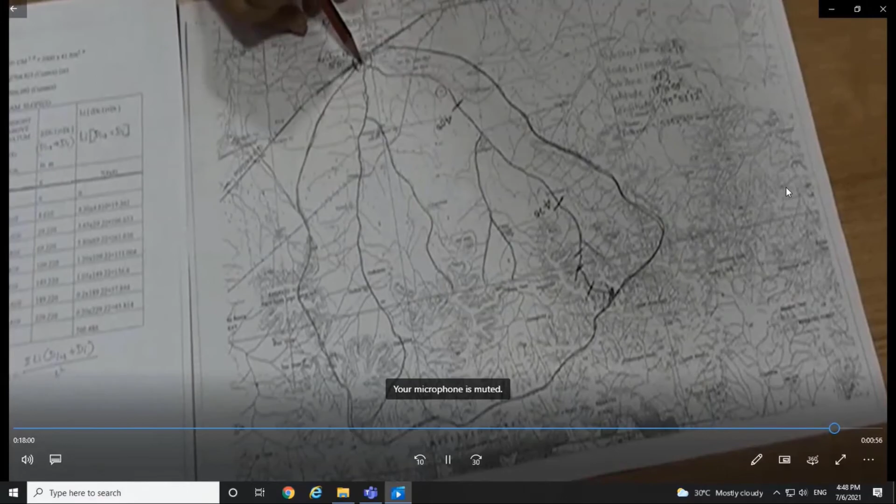So all this data is to be tabulated in this format. These are the distances from the bridge site, these are the levels at the different points where the contours are cutting, naturally at the contour interval. Then the length of the segment, calculated as this minus this.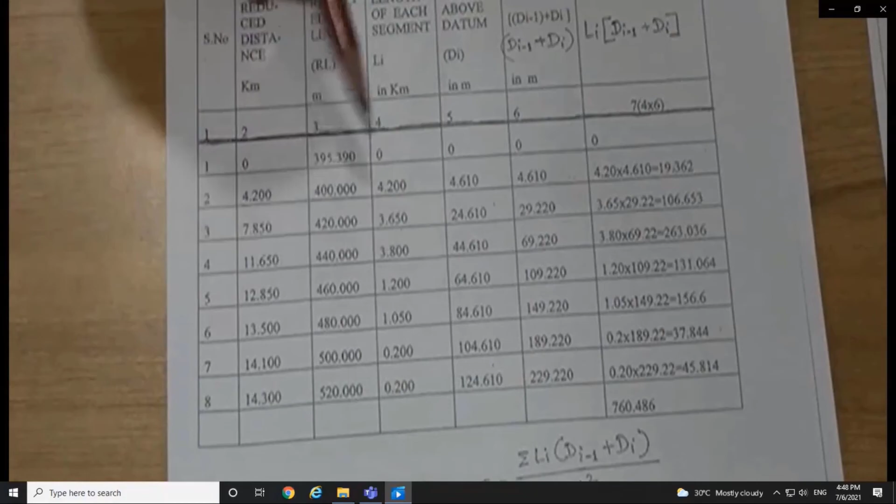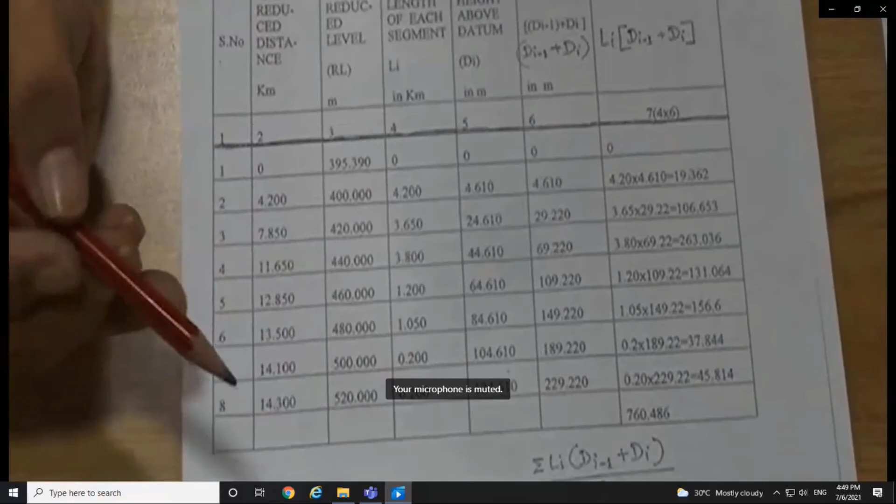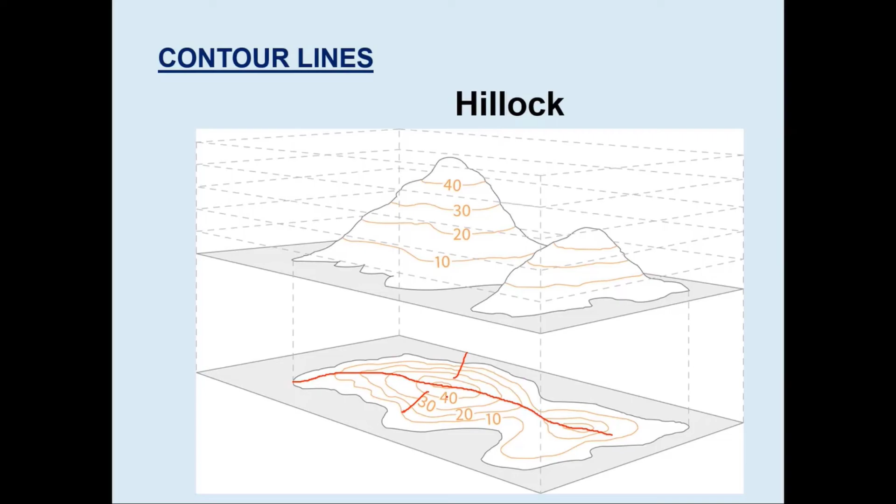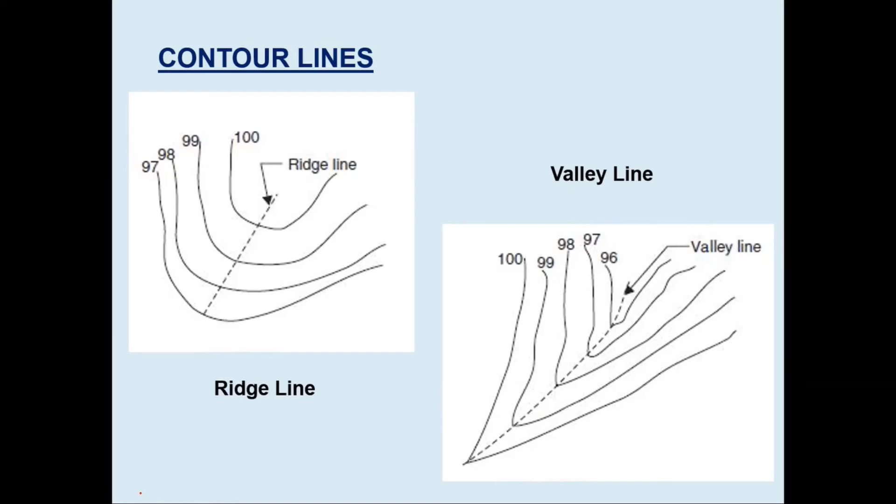This is for the valley. This is a V-shape contour if you have it. These are contour lines marking the ridge line. If we take the front, that is the ridge line. As you depict it, these are its contours. This is the flowing of the river, and this is the valley.

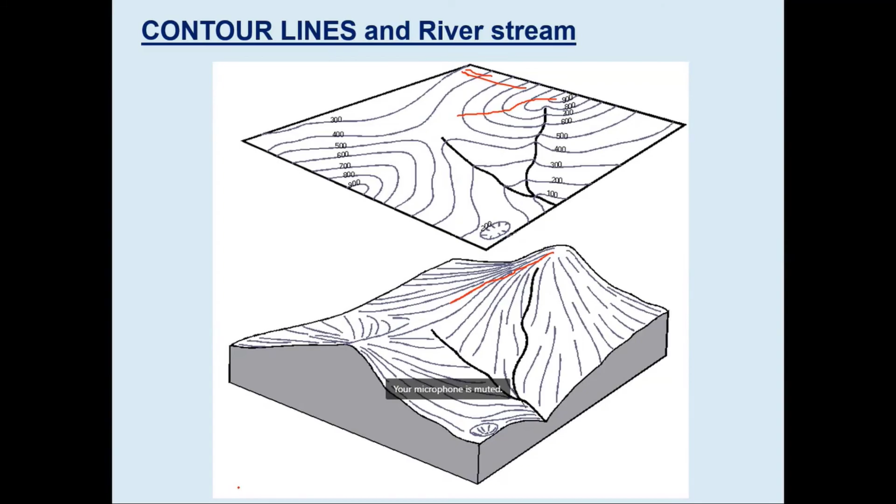So this is how to mark the ridge line.